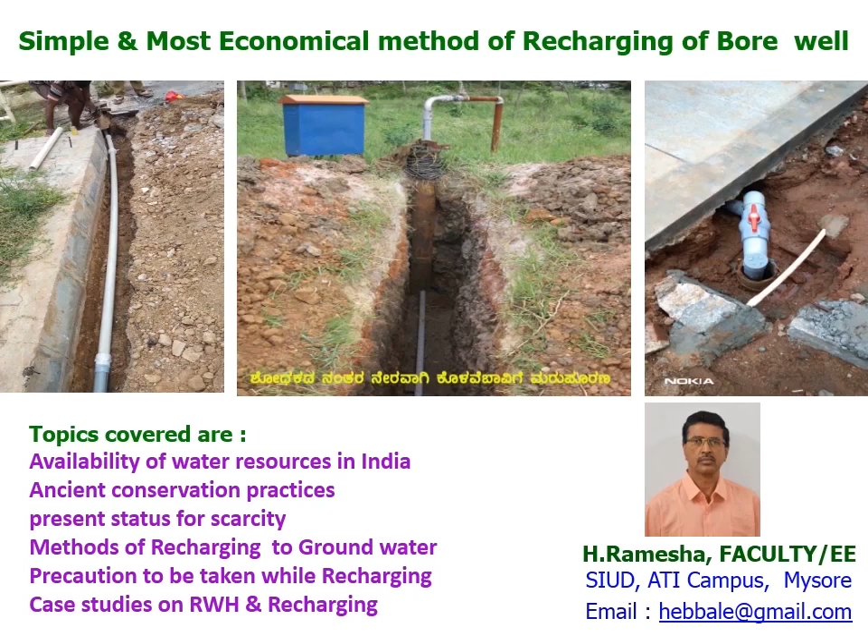First of all, we have to understand the availability of water resources in India. We have very good rainfall of 117 centimeters, which is second highest in the world. Also, 2100 major rivers, 13 lakhs minor irrigation tanks. Also, we have the northeast monsoon, southwest monsoon, snow rivers from the Himalayas, etc. Just imagine if the Himalayas did not exist, North India would become like a desert, and there would be no river flow during summer.

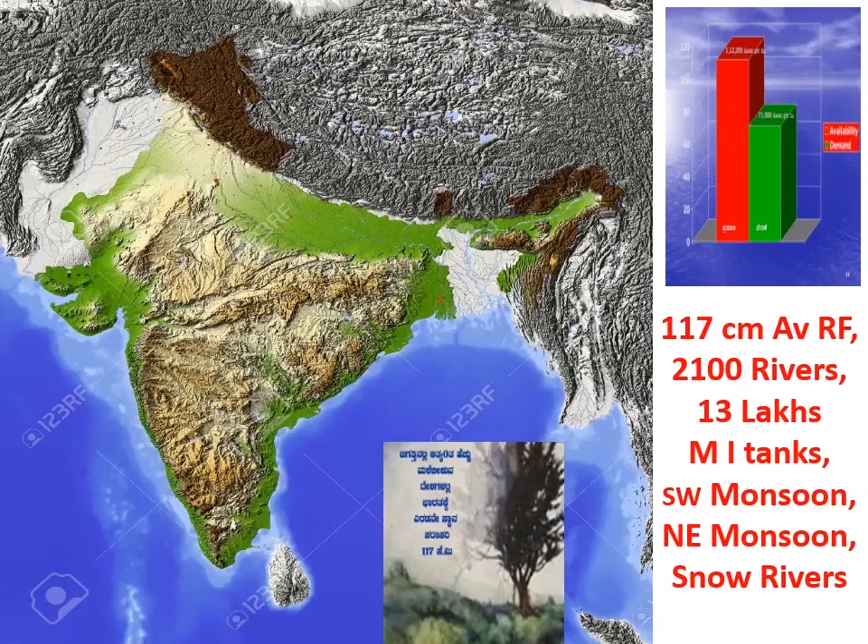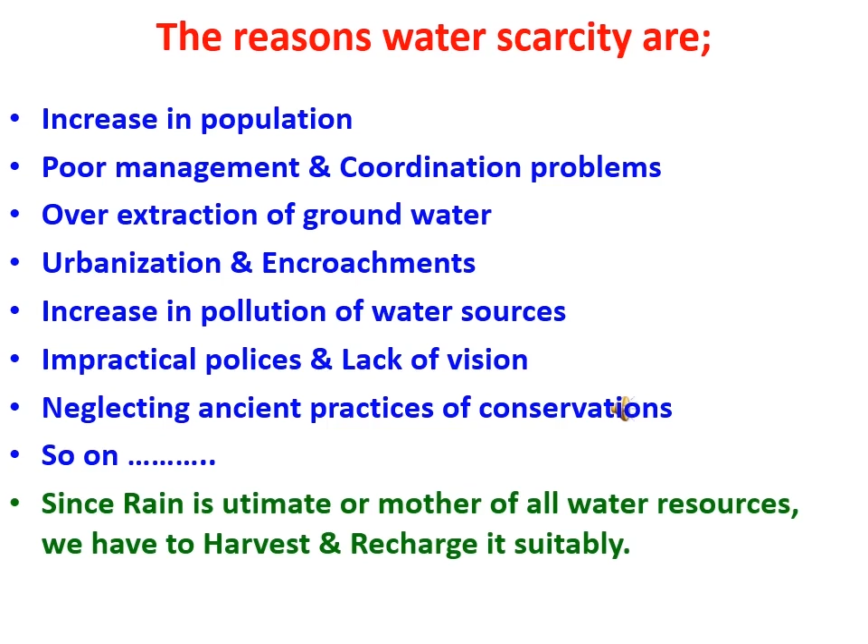Water conservation has a broad meaning. It includes storing, distribution, effective management, and intimacy with water throughout our requirements. The reasons for water scarcity are increase in population, poor management and coordination problems, over extraction of groundwater, urbanization and encroachments, increase in pollution of water sources, impractical policies and lack of vision, neglecting ancient practices of conservation, and so on. Since rain is the ultimate source of all water sources, we have to harvest and recharge rainwater suitably.

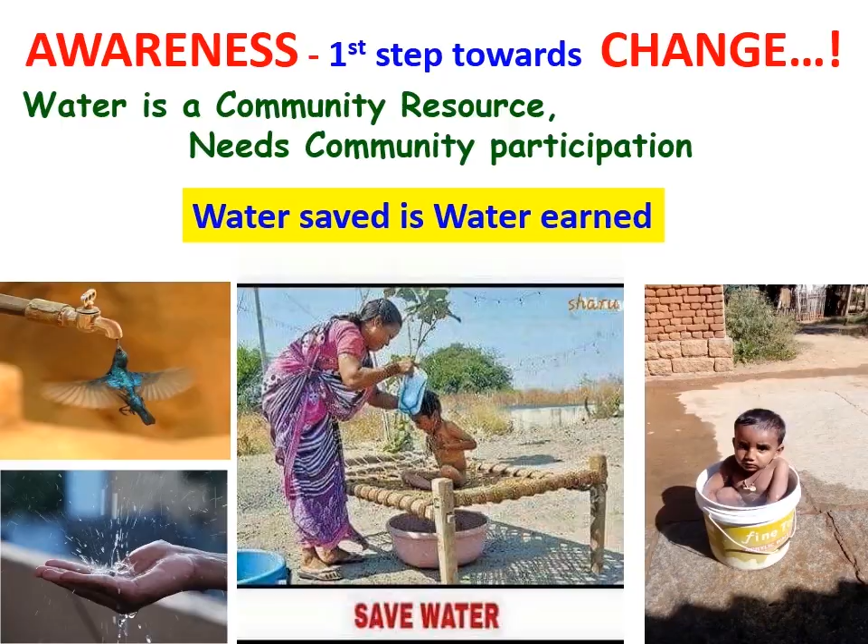Water literacy is the first step towards mindset change. If we come across water awareness, about 50% of the water problem will be solved. From this photo, it is observed that she is managing with the available water. Hence, water is a community resource and needs community participation. Water saved is water earned. Let us understand the benefits of rainwater harvesting and recharging.

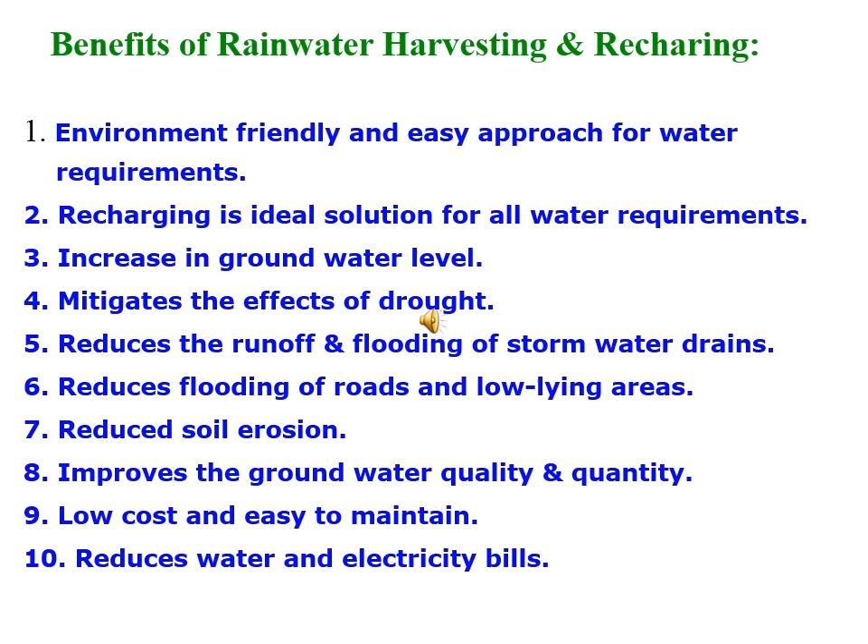Environmentally friendly and easy approach for all our water requirements. Recharging is the ideal solution for all our water requirements. Increasing groundwater level, mitigates the effects of drought, reduces runoff and flooding of stormwater drains, reduces flooding of roads and low-lying areas, reduces soil erosion, improves groundwater quality and quantity, low cost and easy maintenance, and reduces water and electricity bills.

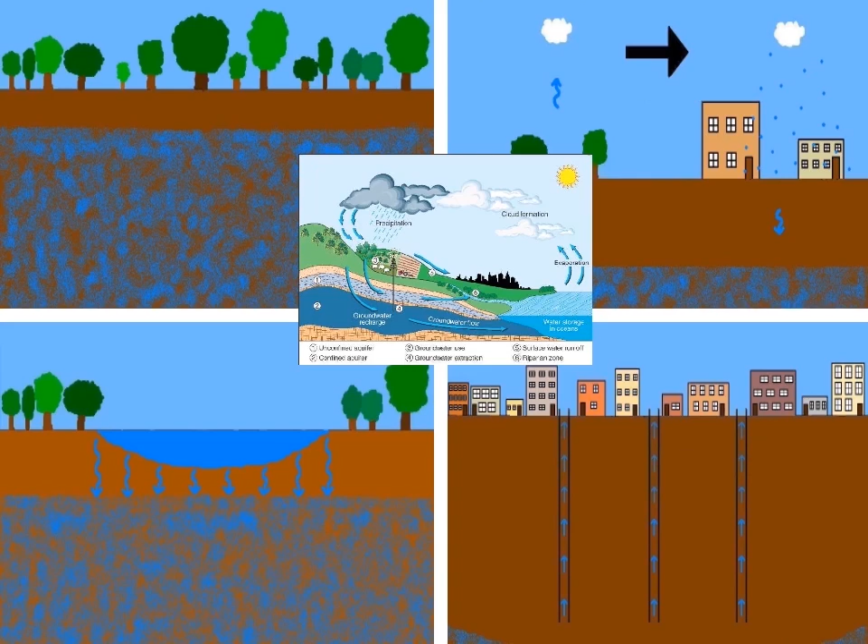Generally, people will calculate the unseen borewell water in terms of 1 inch or 2 inch or 3 inch yield, but ironically, they will not calculate visible rainfall and water quantity. In olden days, groundwater was enriched with forestation, existence of tanks, lakes, rivers, etc. The recharging process was going on the natural way. Now, due to urbanization effects, infiltration of rainwater has become less and runoff water more. Due to increase in population, industries, and over extraction of groundwater through borewells, the groundwater table has drastically lowered.

Evaporation from rivers, lakes, plants, and trees is also reduced, which in turn affects the water cycle and global environment. That is why our ancestors beautifully built water conservation structures considering the future vision. They very well knew the importance of forestation also. If we observe this photo, due to deforestation, runoff and flooding become more and fertile soil erodes, which will in turn affect the environment also.

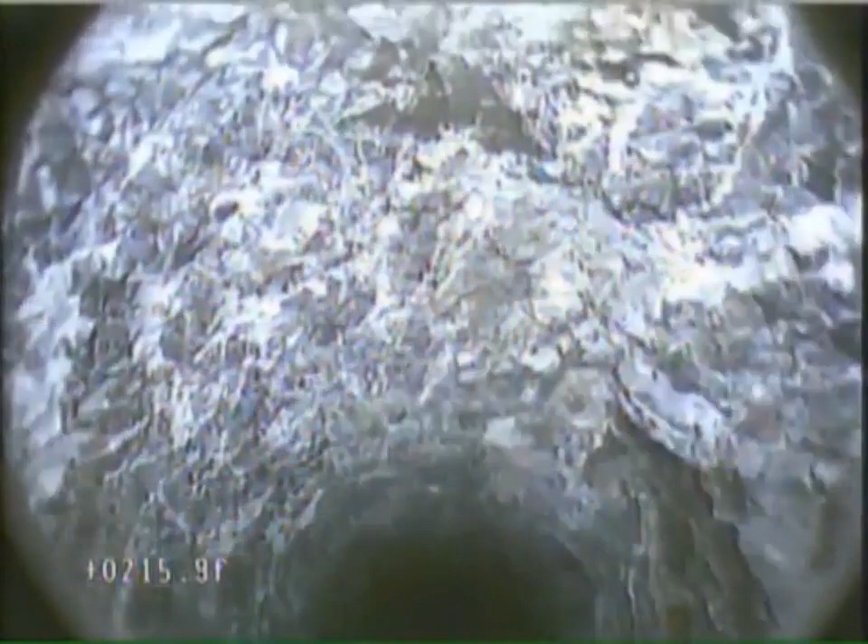In some places in India the borewell depth has crossed about 2000 feet. If we go into the borewell, we can observe the fissures, cracks, and joints in dried condition due to over extraction of groundwater. Hence, recharging is absolutely necessary.

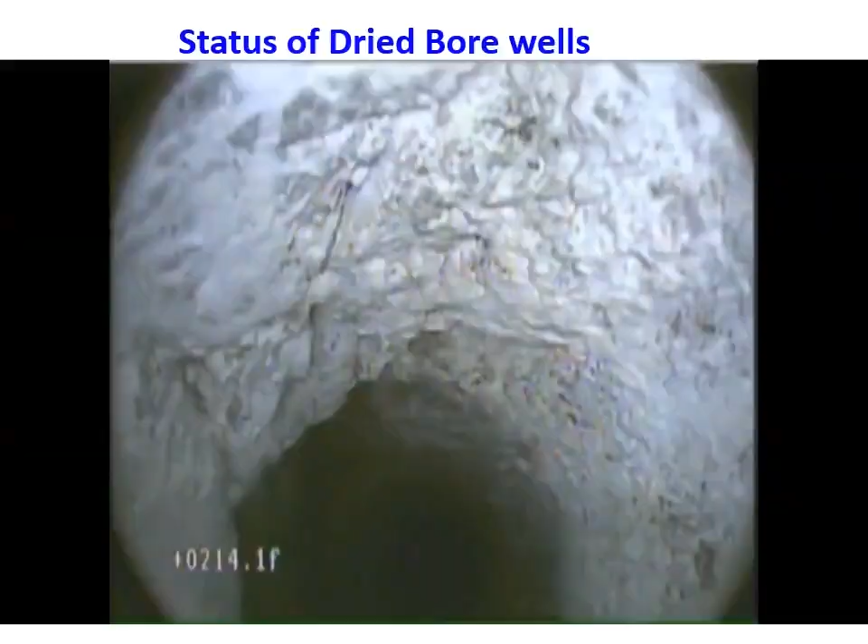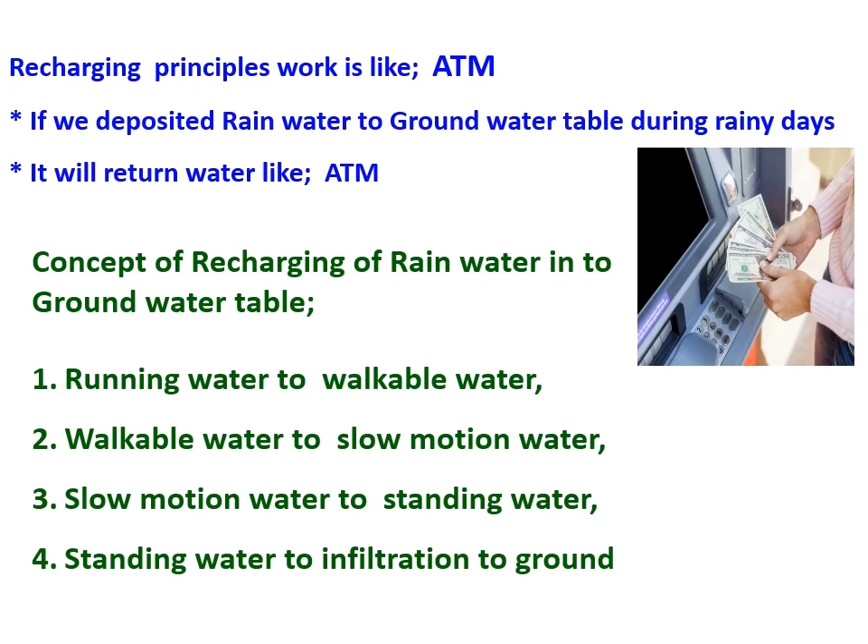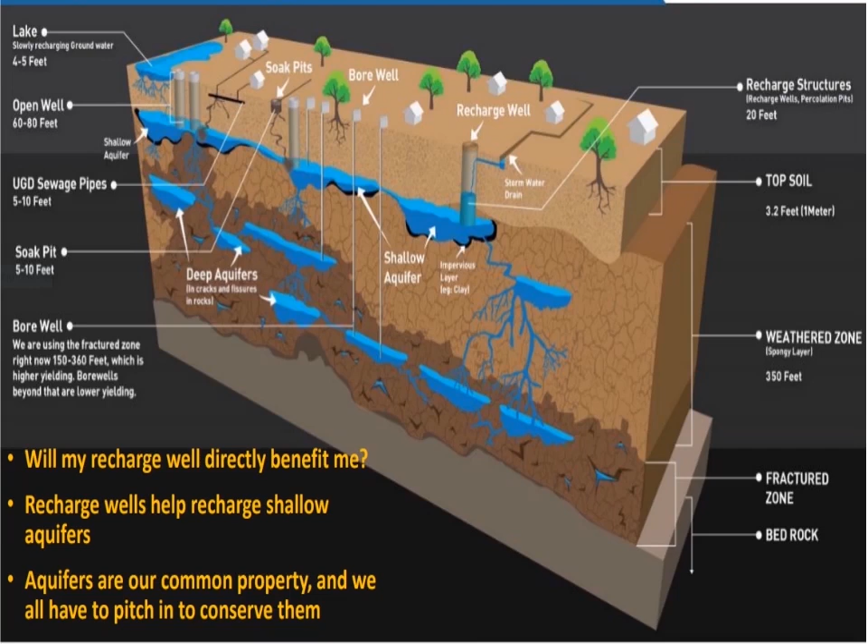Let us understand this geological information diagram. It shows the position of topsoils, lakes, shallow aquifer, borewell, soak pit, water supply line, UGD line, weathered zone, fractured zone, deep aquifers, along with fissures, to know the infiltration pattern of groundwater. These are various geological formations which are beyond our imagination. If fissures, pores, faults, joints or cleavage planes exist in the geological formation, only then will the recharge process occur easily and smoothly.

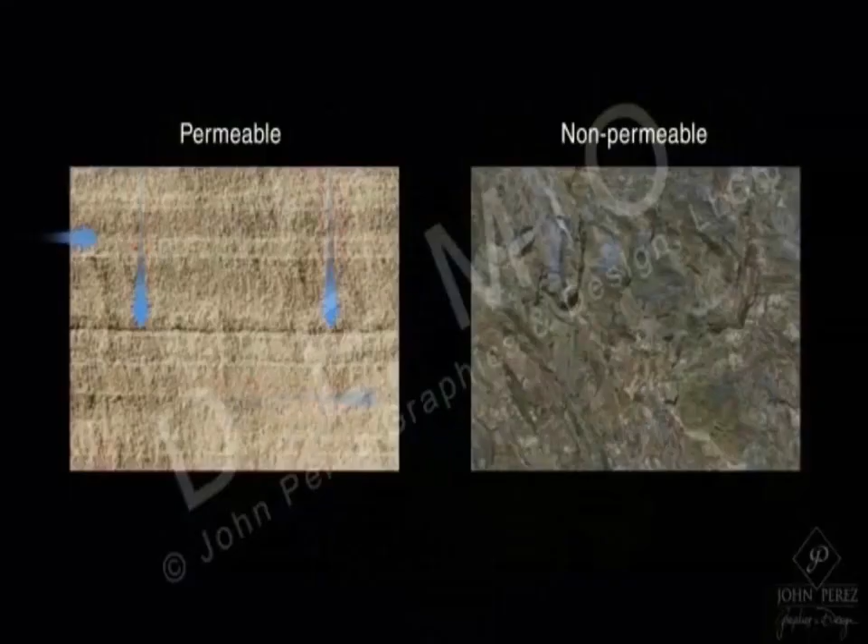This video explains the infiltration process of rainwater through geological formations of the earth into the groundwater table or aquifer.

Permeability is the measure of the rock's ability to allow water to flow through it. The situation makes it very difficult to even compare water resources for wells that are in close proximity. One landowner may have plenty of draw from his well, while a neighbor's well may be in decline because they are drawing from different aquifers at different depths. Or consider this. You may have drilled your well to the same depth as your neighbors' wells on both sides of your property. Each side may be drawing water from an interval with different aquifer permeability characteristics. At your neighbor's well location, the rock may be more porous, and the underlying aquifer recharges faster, compared to the rate at which water seeps downward through denser rock in this location.

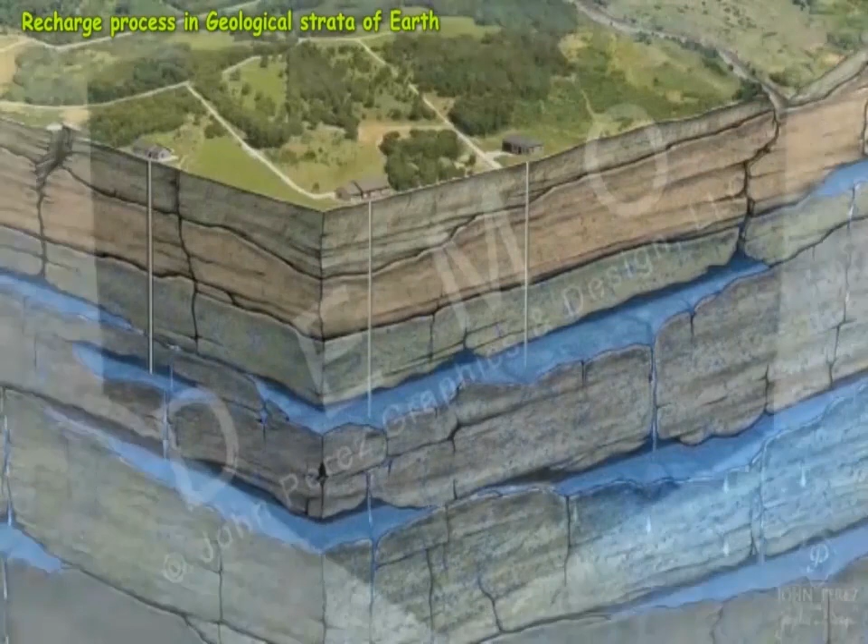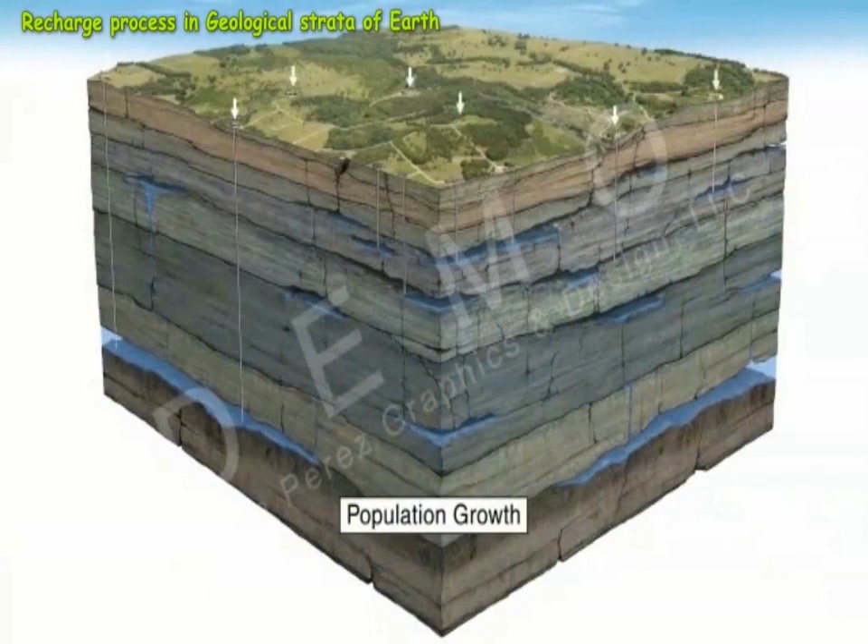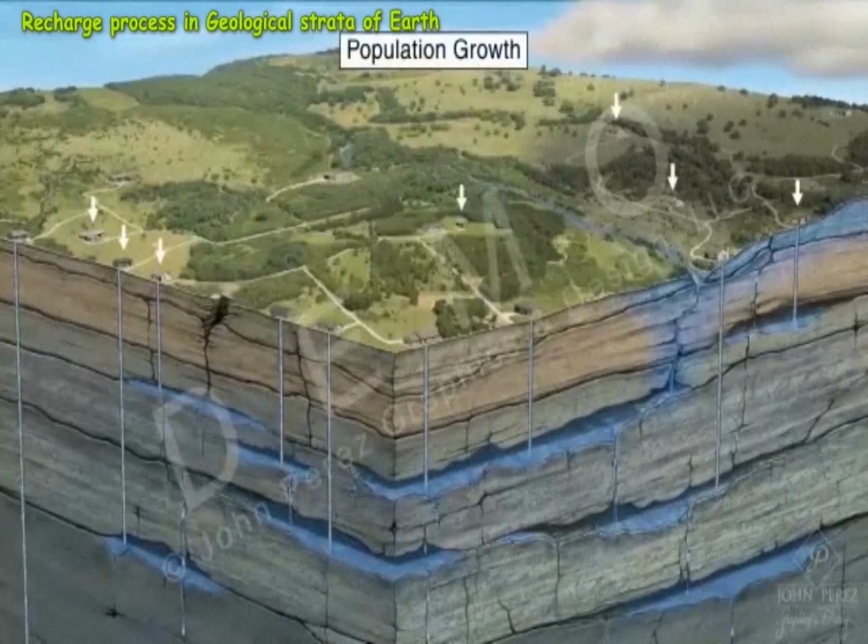You now understand that the groundwater available to residents and landowners across the county can vary greatly, depending on the portion of the Trinity Aquifer from which their wells draw, and the speed at which different portions of the aquifer recharge. It's evident that when demand or pumping exceeds the recharge rate of an aquifer, the net result is a loss of available water for all residents and landowners who draw from that same aquifer. Some areas with lower permeability.

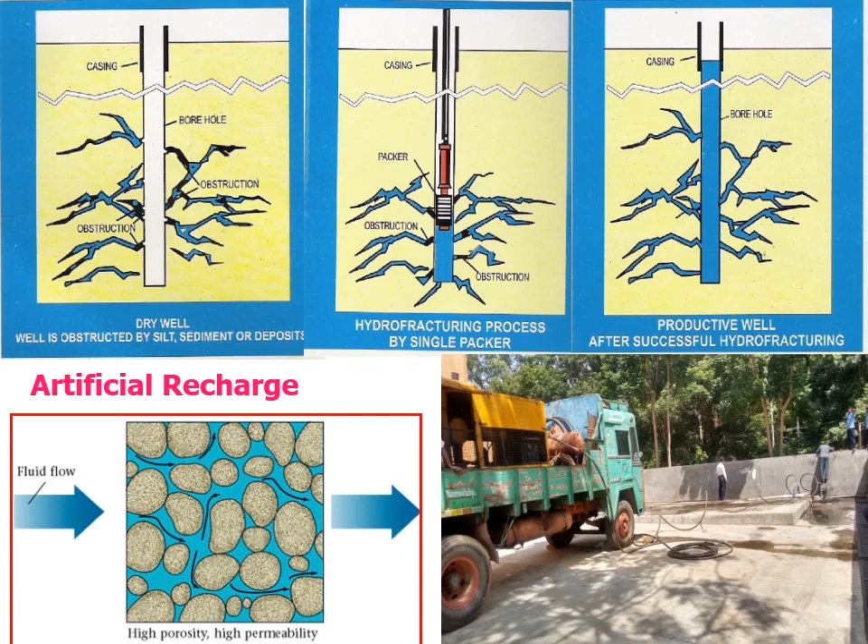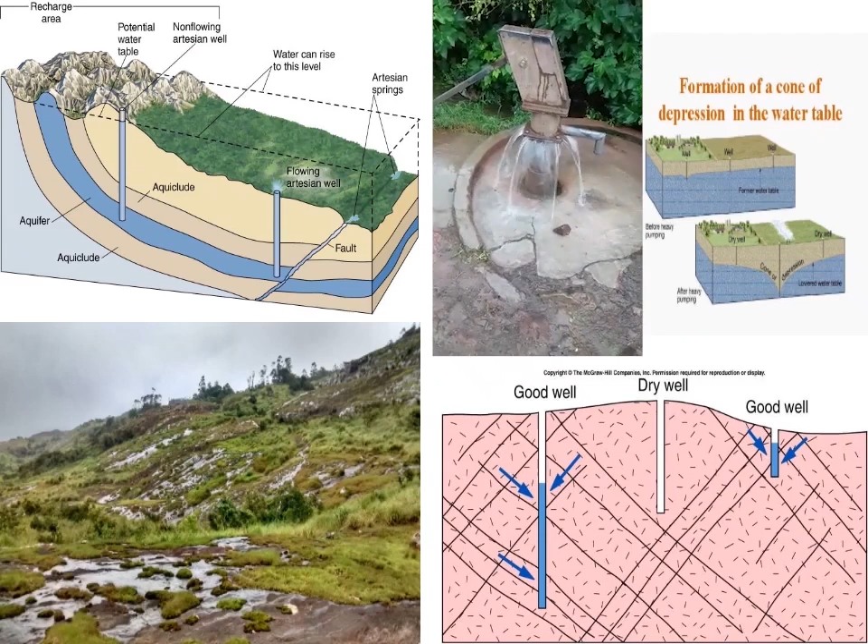When a borewell becomes fully dry, it is better to treat it with the hydrofracturing process. In the hydrofracturing process, high pressure compressed air will be inserted into the borewell, which clears the blockages in the fissures or pores of the borewell like in hard rocks. This borewell will give a smooth path to the recharging process. When the aquifer layer is projected beyond the borewell level, automatically there will be overflow in the borewell or from the fissures.

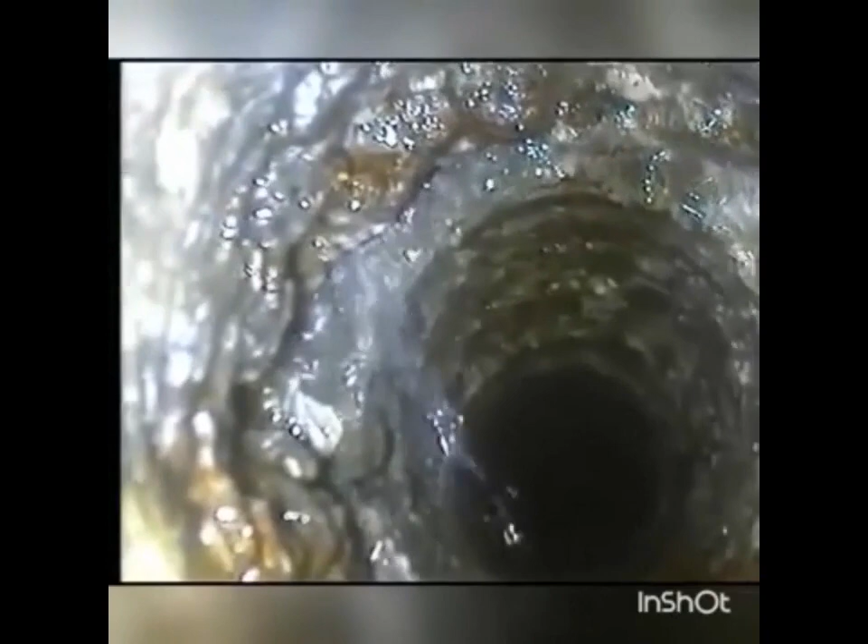The diagram shows that when the borewell is in contact with fissures of the geological strata, it can easily recharge the groundwater table. When the borewell is not in contact with fissures or faults or folds or joints, recharging will not take place. Then these borewells will fail to recharge. This video shows recharging of borewells through fissures or pores in a natural way.

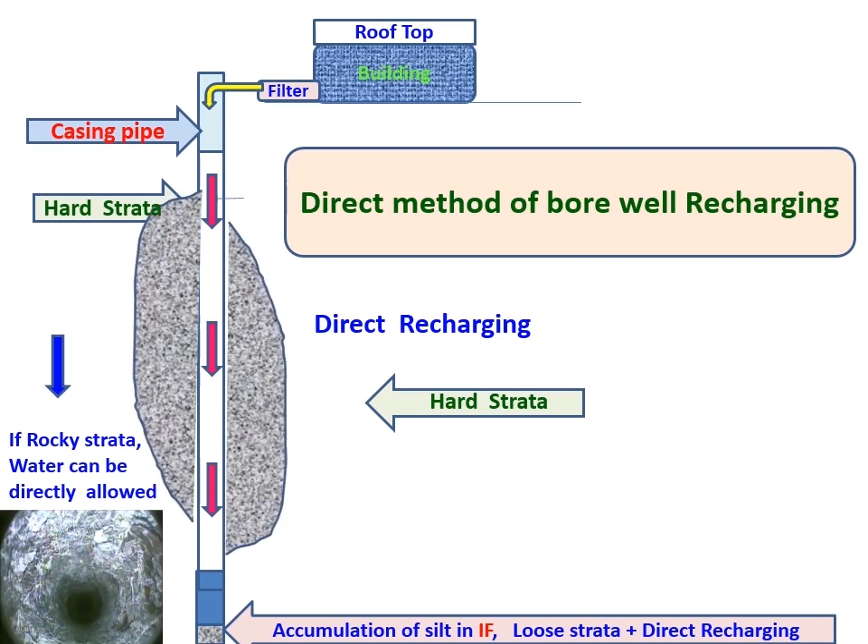Direct recharging of borewells. This is the simplest method of direct recharging of borewells. Rainwater will be diverted from the rooftop with simultaneous filtration. Then this filtered water can be connected directly to the borewell if the borewell is located in hard strata or hard rock regions. If the borewell is located in a hard strata region, as shown in the diagram, we can directly and safely recharge the rainwater instantaneously after filtration. This video explains the process of the direct method of rainwater recharging in a hard strata region.

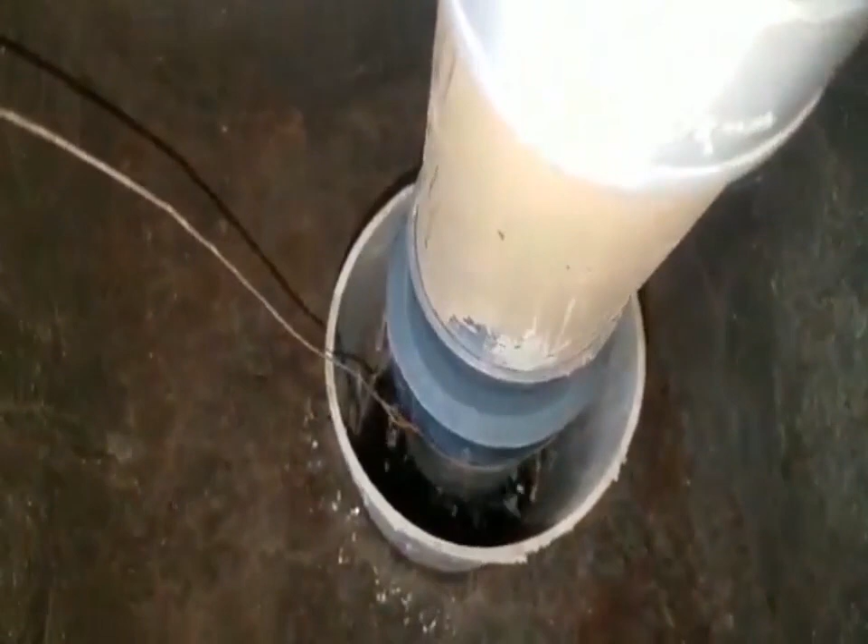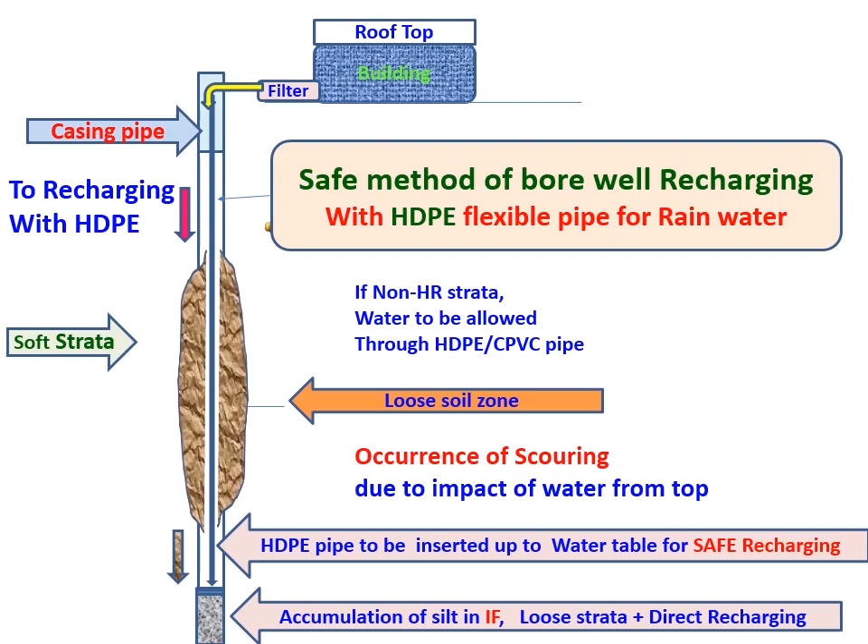How to measure the groundwater table level? By the crude method, by tying a small stone at the end of a thread, allowing it into the borewell slowly. When the stone touches the water top, it is sensed by the person who is holding the thread. Then, by measuring the thread length, the level of the water table in the borewell can be found out.

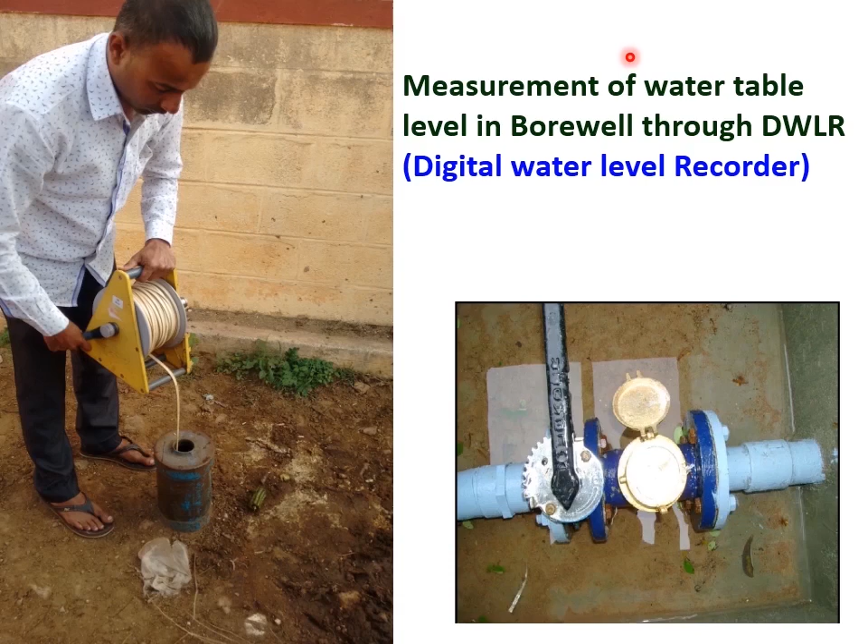Nowadays, the digital water level recorder DWLR instrument is used. The instrument has a graduated tape and a sensor at the end. When the sensor touches the water top, it gives a beep sound with a light at the top at ground level. By reading the graduated tape, it is possible to measure the depth of the water table level in the borewell, and also we can estimate the length of HDPE pipe required for recharging purposes.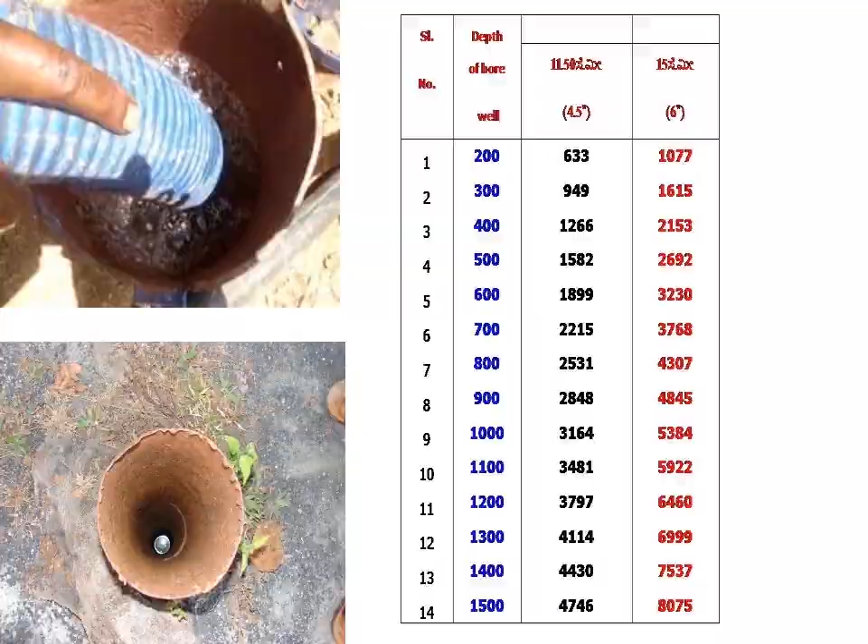It is possible to find out the empty volume by knowing the diameter of the borewell and vacant depth of the borewell at each stage from this table to ascertain the capacity of the borewell. For example, if we consider a 6 inch diameter borewell with 800 feet of vacant depth, the capacity of water will be 4300 liters. Depending on requirement or necessity, it is possible to fabricate or customize a borewell cap to accommodate the suction pipe, jet pump, cable and recharging pipe to facilitate borewell recharge.

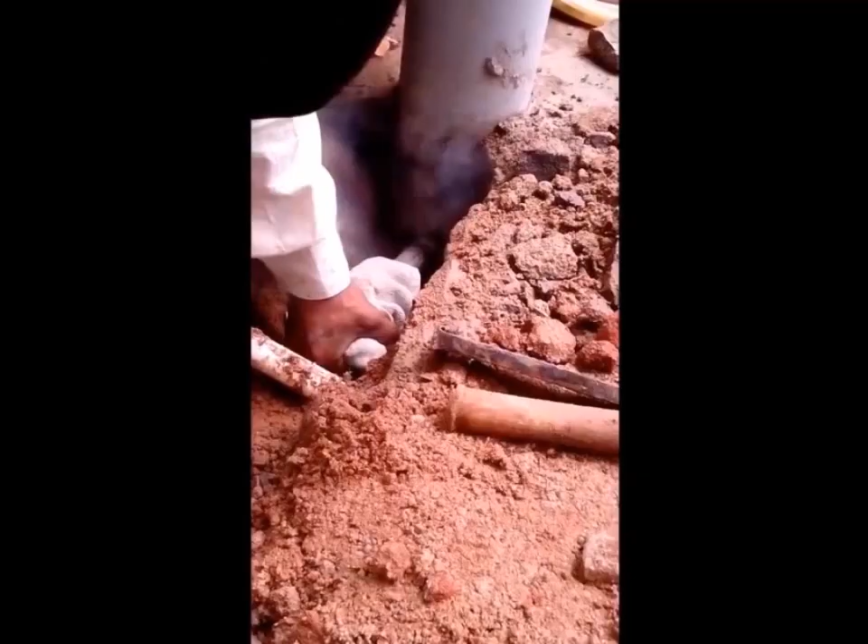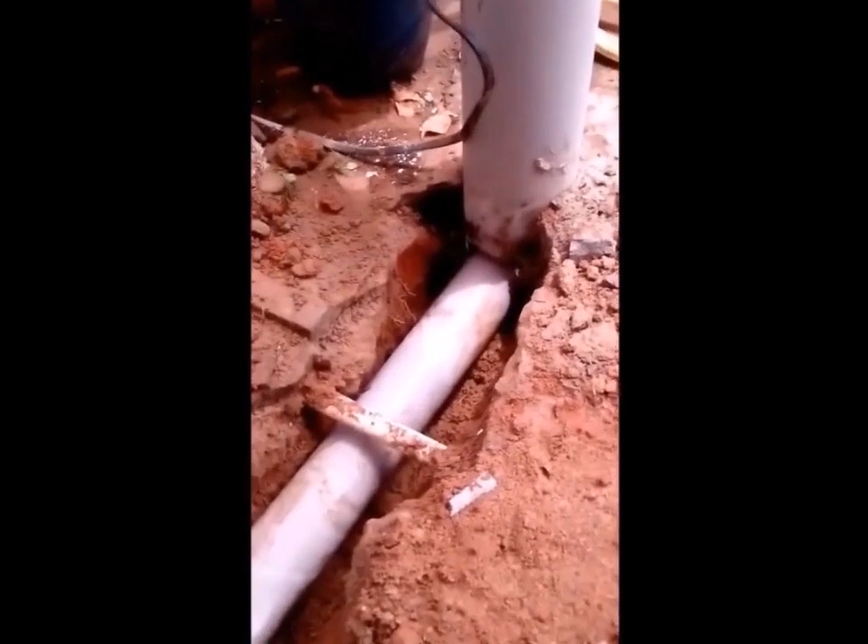In this video, the rainwater collected from the rooftop is filtered and it is connected to the casing pipe by punching, to recharge rainwater directly to the borewell, which is located in a hard rock region.

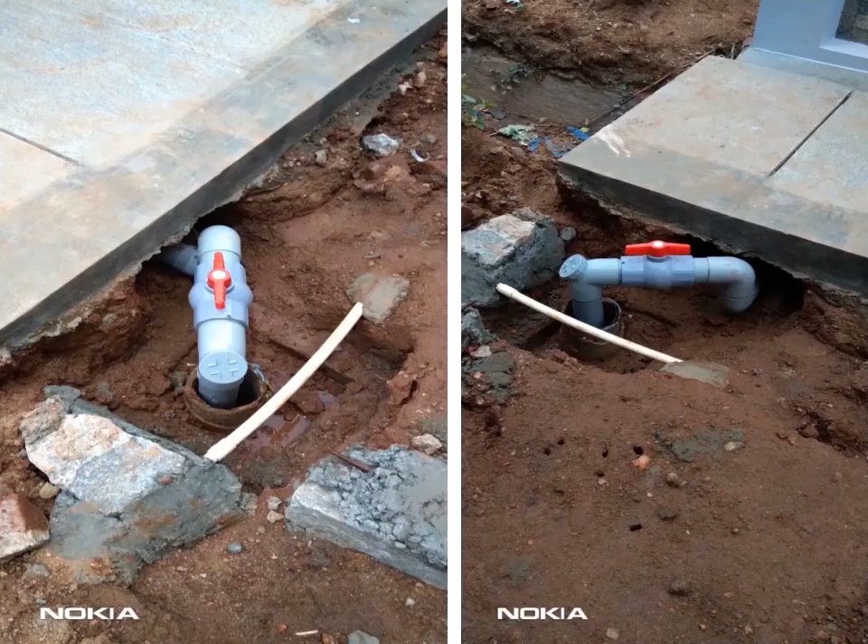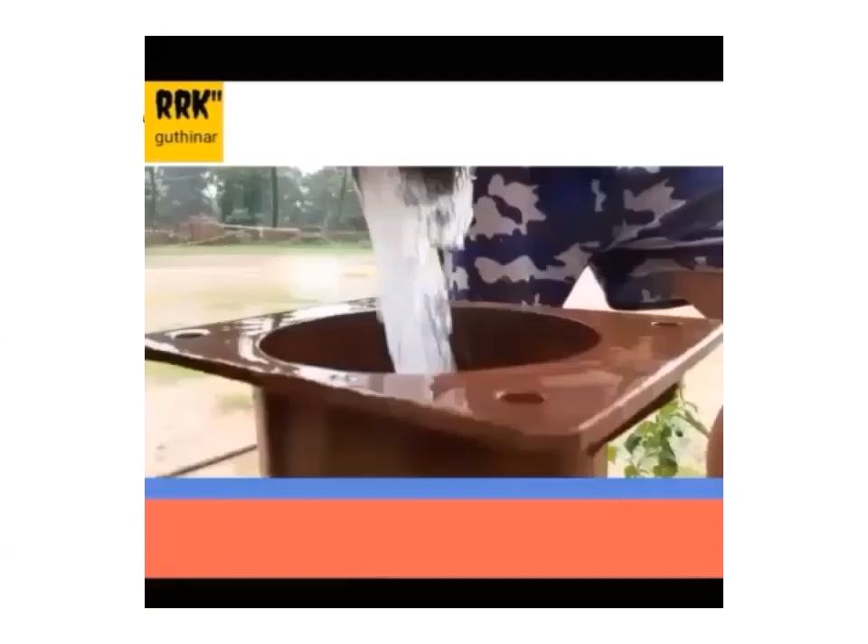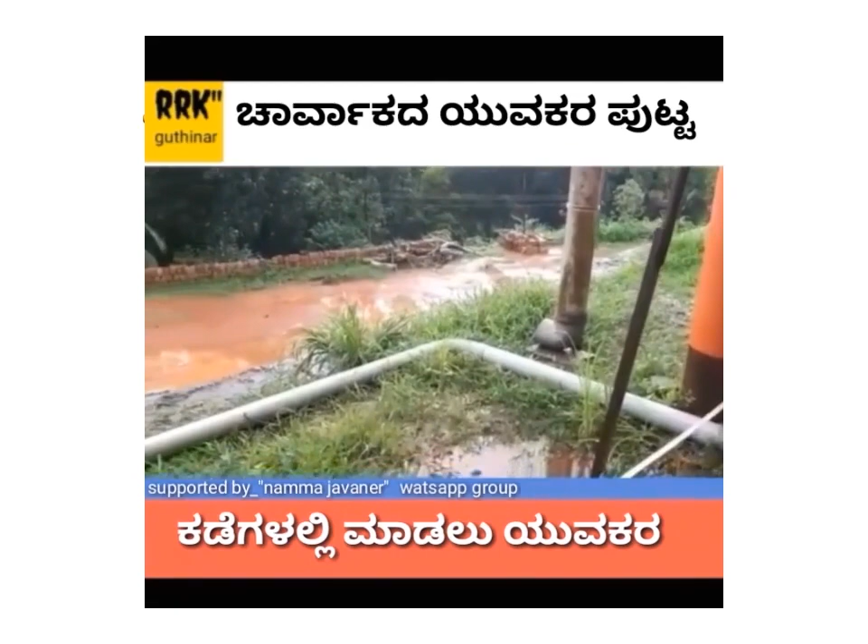Here, first of all, rainwater is collected from the roof. After filtration it is allowed into an underground sump tank. Then the sump tank overflow is connected to the borewell for direct recharging. In this demonstration video, the rainwater collected from the rooftop was directly connected through a PVC pipe into the borewell for recharging purposes.

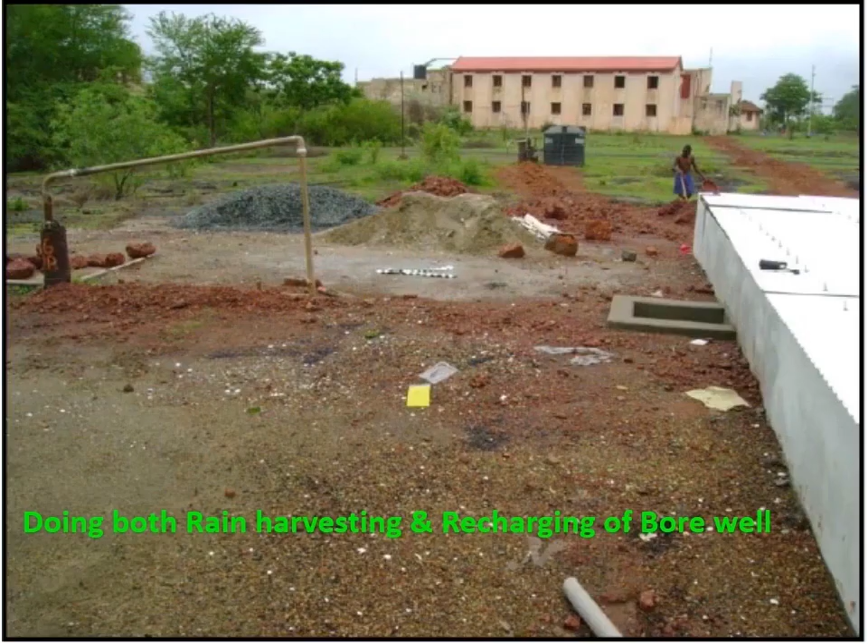This photo explains both rooftop rainwater harvesting and recharging. First, rainwater collected from the rooftop is diverted to an underground tank after filtration. Again, the underground tank overflow pipe is connected to the borewell for direct recharging.

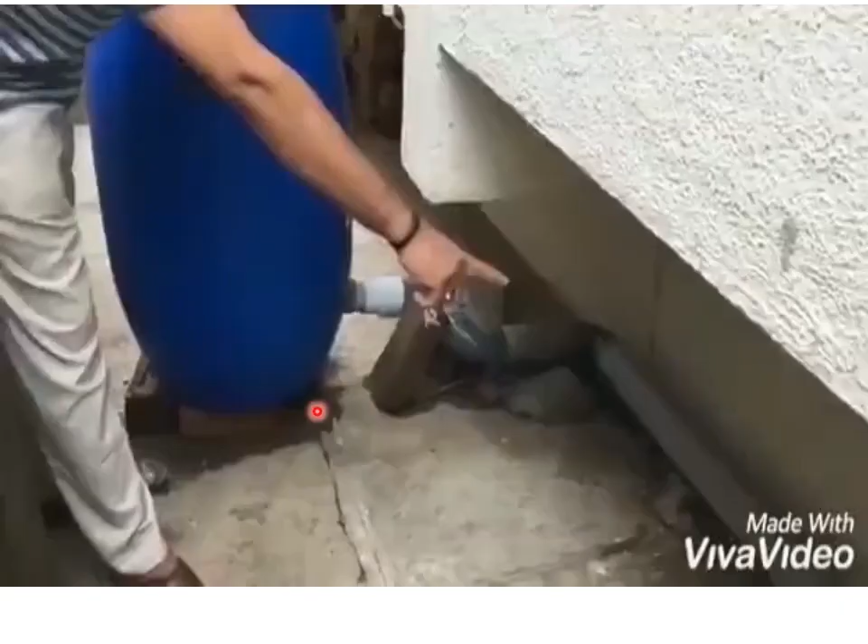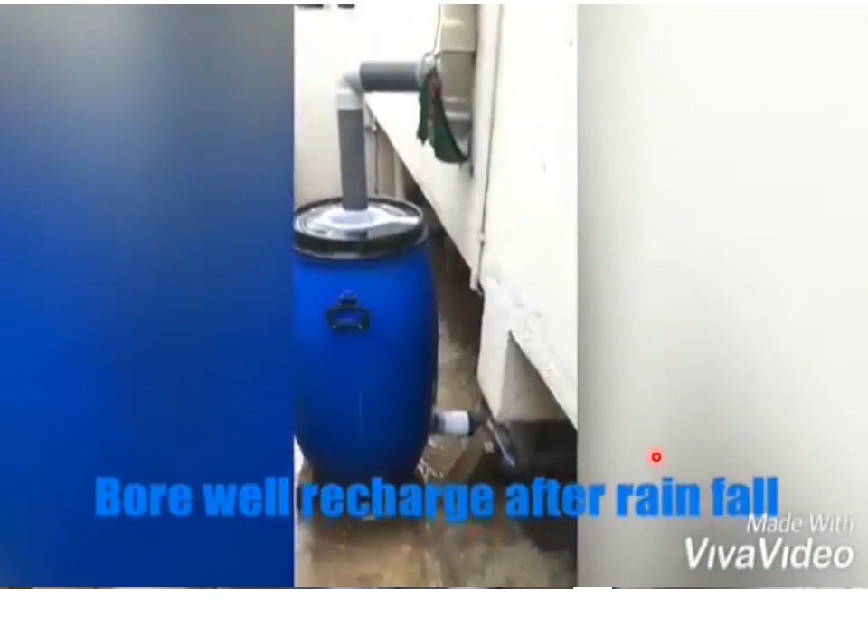He is demonstrating the process of rooftop rainwater harvesting, filtration process, and direct recharging process to borewell in hard rock region. Water comes from the rooftop through this pipe, and we have to install one drum like this, which is having a lid. We have to cut it here, and here, and put two such strainers to filter the water, so that only a little bit of dust flows through this pipe and directly enters the borewell.

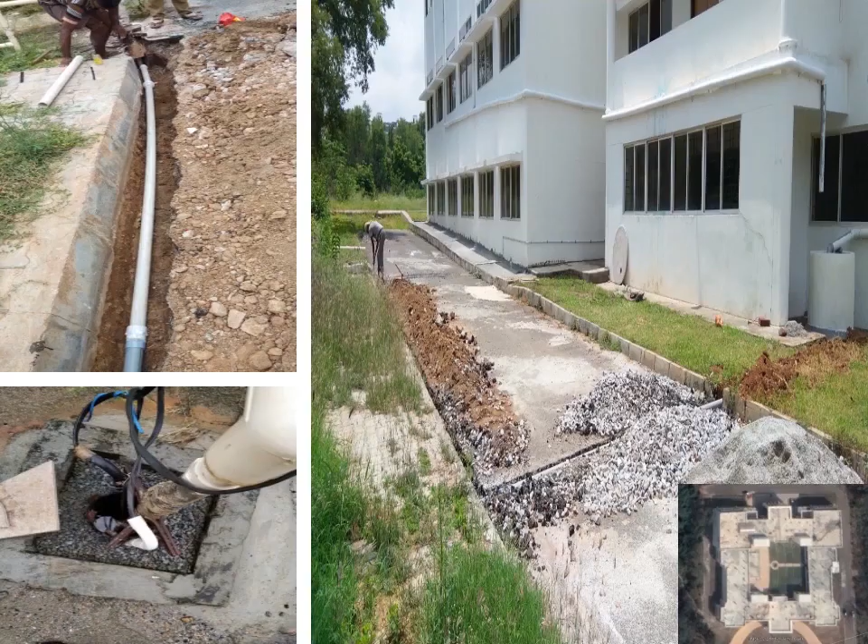This photo shows the process of rooftop rainwater harvesting, direct recharging process to borewell. Effect of recharging: this is one of the case studies from University of Mysore. About 50% of the rainwater was diverted to a 75,000 liters capacity sump, and another 50% of the roof water was diverted through CPVC pipe into the borewell and up to the water table after due filtration. This borewell water was tested before recharging and after recharging.

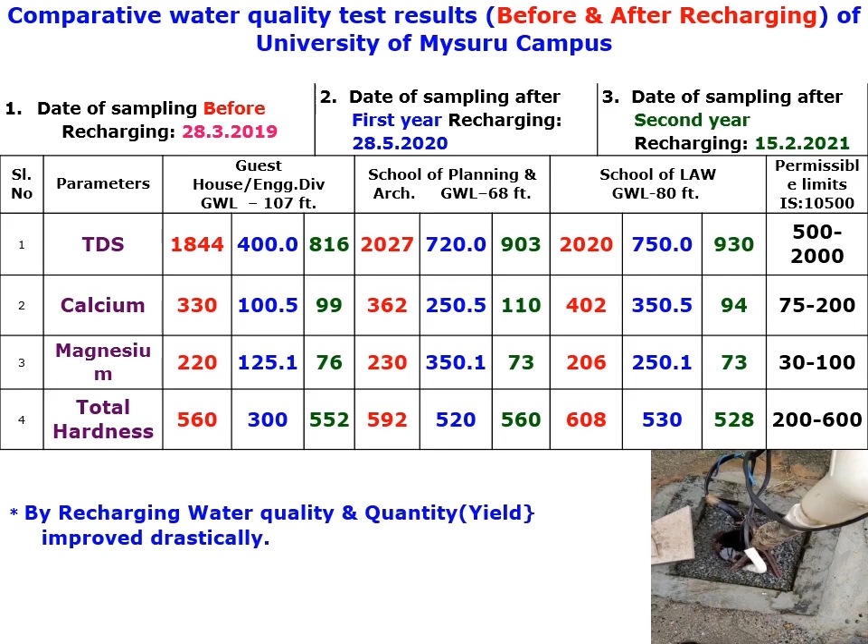It was observed from the test report of the borewell water that total dissolved solids was reduced from 1844 to 400. Calcium was reduced from 330 to 100. Magnesium was reduced from 220 to 125. And total hardness was reduced from 560 to 300. By this way, the quality and quantity of groundwater was improved drastically with dilution of hard water, which in turn saves money to University of Mysore towards establishment of a new RO plant.

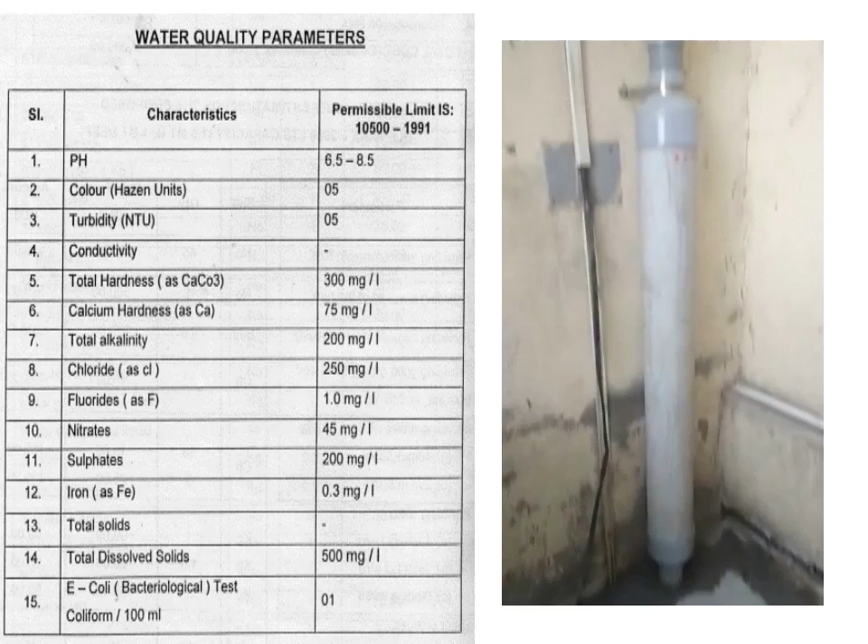This table shows various water quality parameters as per Bureau of Indian Standards IS 10500 for drinking water standards, such as color, turbidity, sulfates, fluorides, iron, TDS, alkalinity, chloride, etc. This slide also demonstrates one more example of direct recharging of borewell through rooftop rainwater.

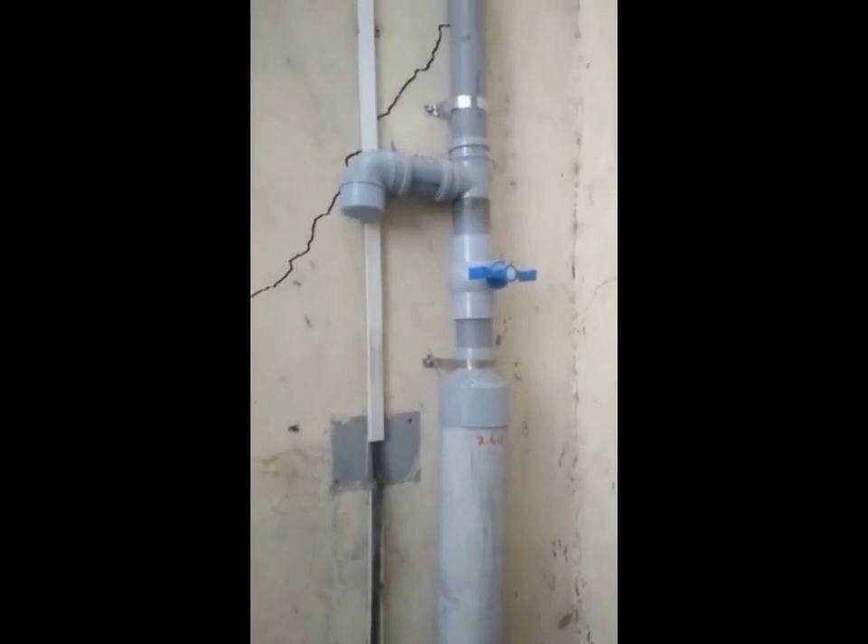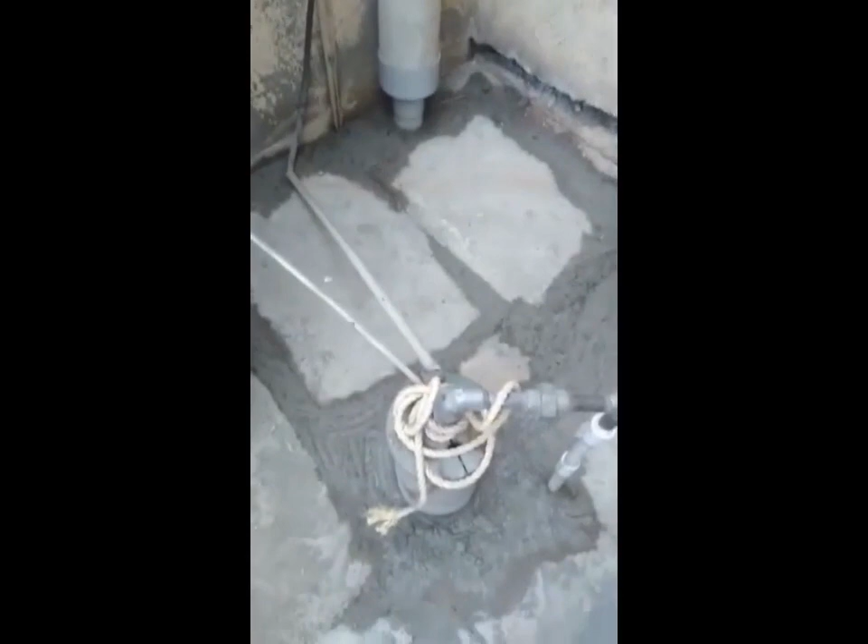Before recharging of borewell, we have to ascertain the recharge capability of the borewell. We have to conduct a simple recharge test. This test will help to design the recharging water quantity to suit our field requirements. For this, we have to go on filling tanker water directly into the borewell with known quantity and known time. While doing this, if water overflows from the borewell, we can conclude that the recharging capability of the borewell is low. If water does not overflow from the borewell, we can conclude that the recharging capacity

of the borewell is high. With the help of known time and known quantity of filled tanker water, the rate of recharge can be derived. For example, if we filled 40,000 liters of tanker water within 2 hours duration, then the rate of recharge will be 20,000 liters per hour, if the borewell does not overflow.

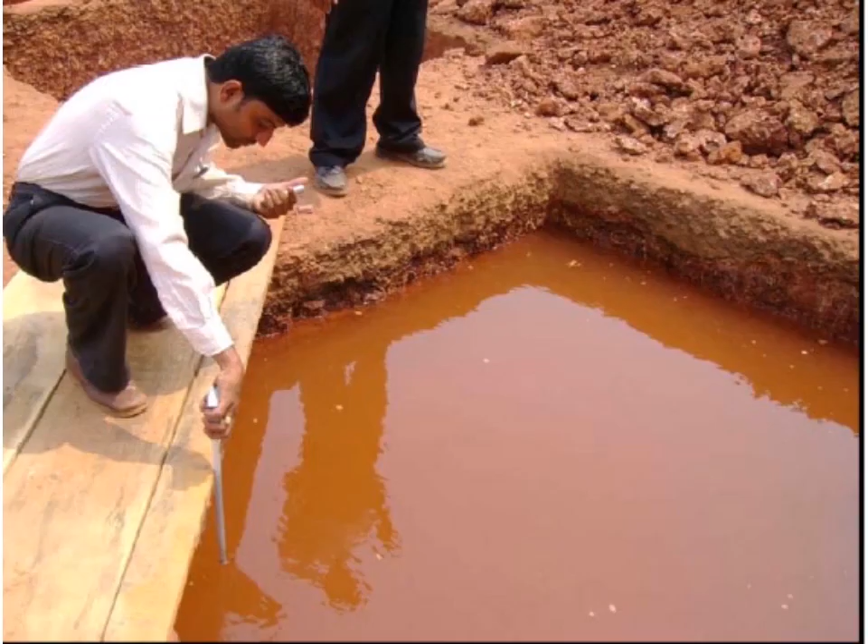Like that, in open fields, it is easily possible to ascertain the recharge capacity of the ground with a known size of pit. First of all, we have to fill the pit completely with tanker water. Note down the time. We have to go on noting the time with respect to drawdown condition at frequent intervals, say every half an hour, till the end. With the known time and quantity of water, we can calculate the rate of infiltration. These results will help to design suitable recharging structures as per the different site conditions.

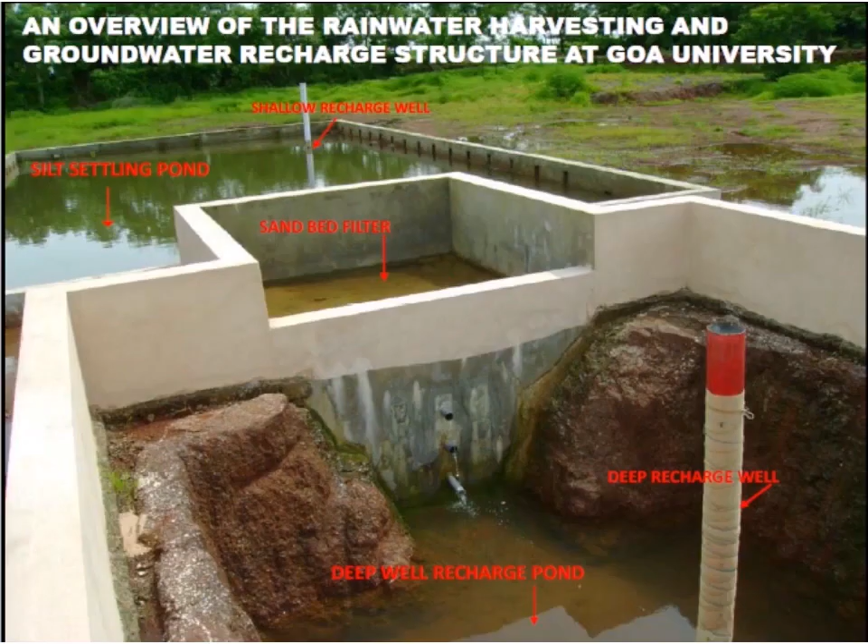Indirect recharging of borewells in open fields in hard rock regions. This type of recharging is usually adopted in open fields. Rainwater will be collected at the sedimentation chamber or silt settling pond for desiltation process. Then this silt-free water moves to the filter chamber. After this, filtered water will percolate through perforations made in the borewell casing pipe. This type of recharging suits only hard strata regions or laterite zone regions.

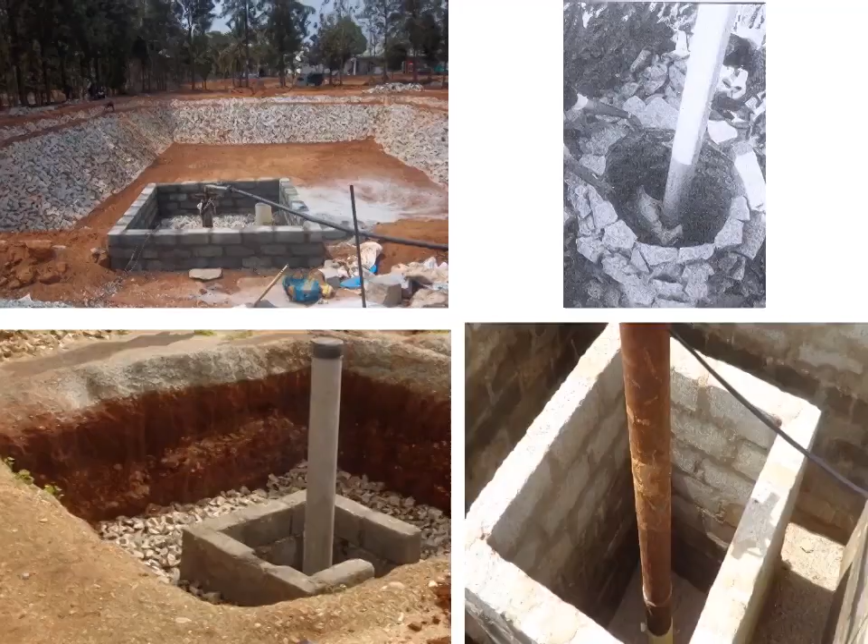Indirect recharging of borewells in open fields in hard rock regions. In these cases, chambers are constructed around the borewell in circular, rectangular or square shape. Size of the chamber depends on the catchment area, type of geological strata, vegetation cover, type of soil, intensity of rainfall over an area, etc. Usually, the chamber around the borewell will be filled with jelly of 20 mm to 40 mm size stone aggregate, which acts as a natural filter.

We have to provide micro level nylon mesh at the top to control soil particles entering the filter media, to avoid clogging. This filtered water will recharge slowly through the perforations of the casing pipe of the borewell. This video is an example of indirect recharging of borewells in open fields of hard strata regions. The flowing water will enter through the stone aggregate around the casing pipe to filter and then into the borewell instantaneously to recharge.

This is an effort to build awareness of a simple and most economical way of recharging borewells with rainwater to save our Mother Earth. Thank you for watching this video.